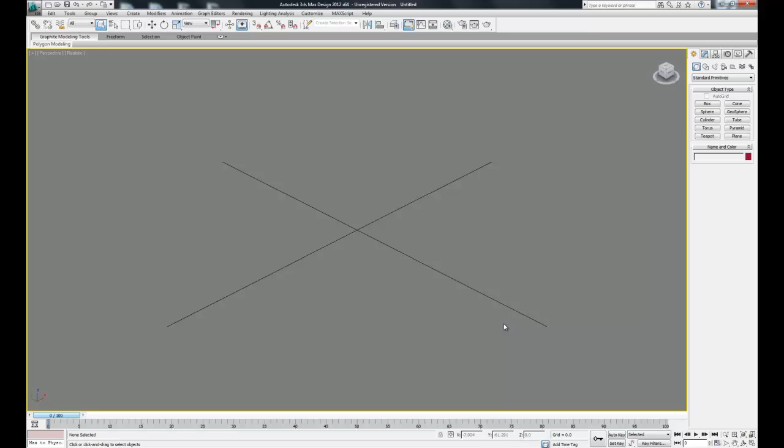So let's start by opening up our work cell. You can either open up your existing 3ds Max animation file, or you can re-import the Inventor file, whichever you prefer. So I'm going to re-import this and I get the import screen. I'm just going to accept the defaults here.

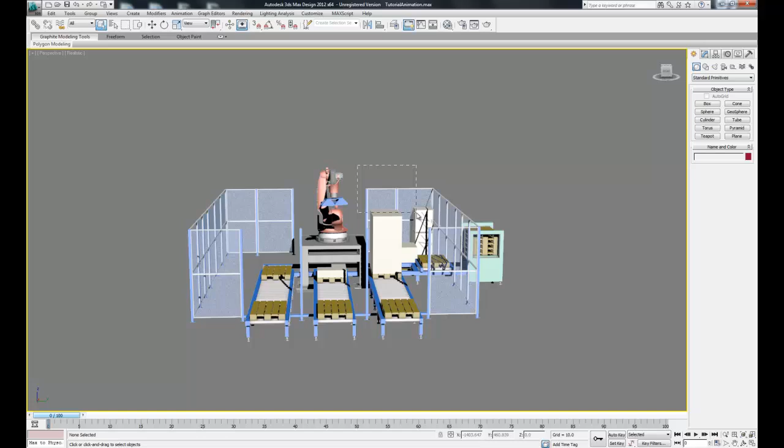So now we have our work cell up. What I'm going to do is hide everything except for the robot to make it easier to work with. So I'm going to select the objects, right click, and hit hide selection to hide everything.

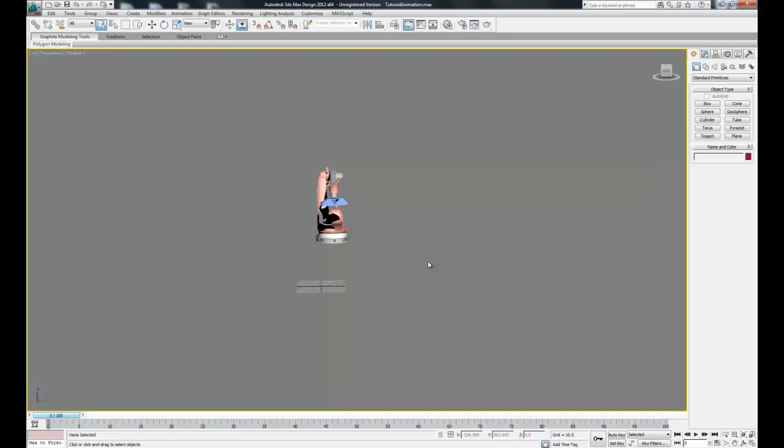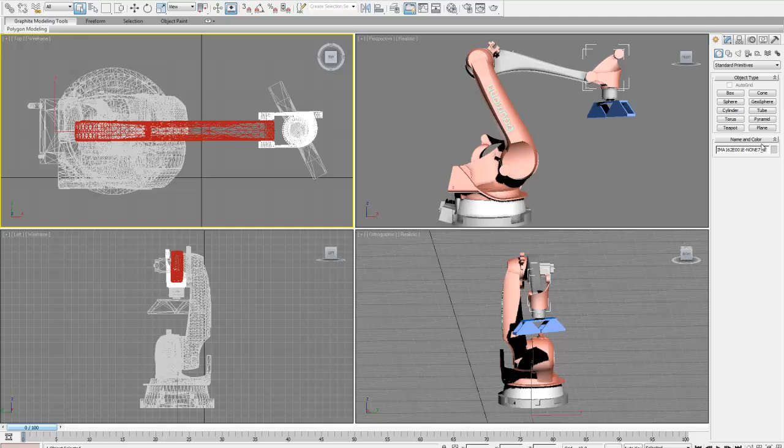So now that we have just our robot, what I'm going to do is set up the viewport so it's easier to see everything. You'll notice in the wireframe mode all the pieces are white, so what I'm going to do is change each of these to a different color so they're easier to differentiate. Over in the Create tab under Name and Color, there's a little box that has a color. So after we've selected our object, we can click that box and change it to whatever color you'd like.

So now that that's all done, I'm going to go into the Hierarchy tab and we're going to start doing our forward kinematic setup. First, make sure Pivot's selected, and then we're going to select the lower arm and work with that first. Now what we're going to be doing is readjusting the pivot point of each object so that it's centered at the place where we want the object to pivot around, and that way it'll look natural.

Now what we're going to do is select Affect Pivot Only in the Hierarchy tab. What that's going to do is allow us to move just the pivot without moving our object. You'll notice the pivot point isn't exactly where we want it, so we're going to need to move it.

Now when doing forward kinematics, it's really important that we work in the local coordinate system, and I'll explain why in a little bit. Over in the Hierarchy tab, there's an option called Center to Object. What that's going to do is move our pivot to the center of our object, which is going to give us a good place to start when we reposition it. So we see after we selected that, the pivot point moves to the center of our object.

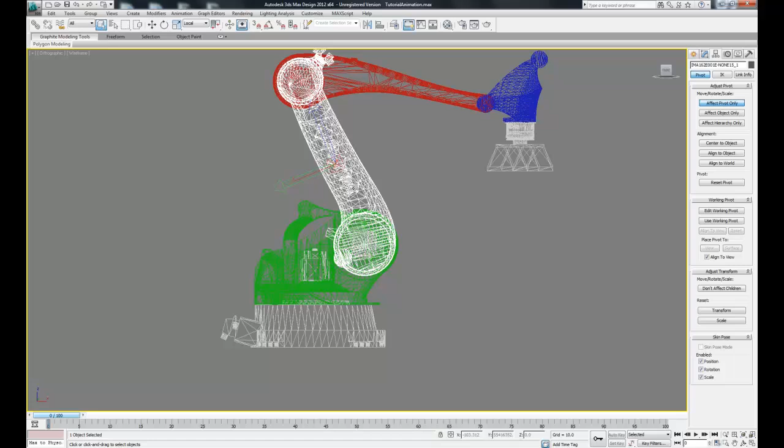So now what we're going to do is maximize the screen so we can get a better look, and then click the Move command, and then move this down to the lower pivot point where we want this arm to pivot around. Again, make sure you're working in the local coordinate system. We don't have to be too precise here, just as long as we get the desired effect.

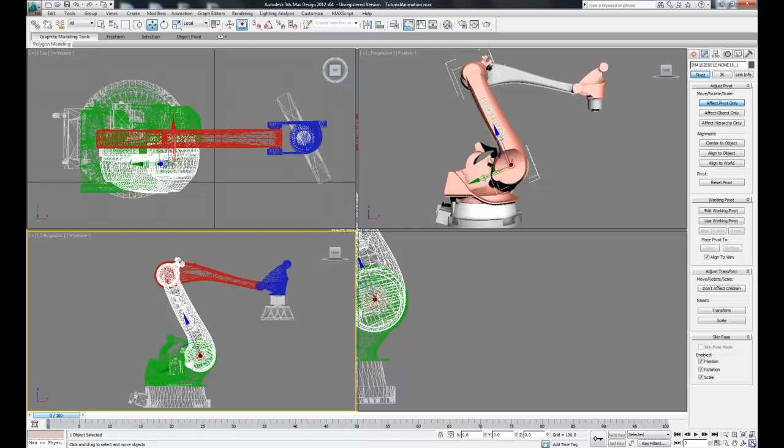So once we have this about where we want it, we can check to see if it's in a good position. Let's deselect Affect Pivot Only, and we're going to actually rotate the whole arm to see what it looks like. So click the Rotate command, and then we can rotate it about the proper axis and check to make sure it's rotating properly.

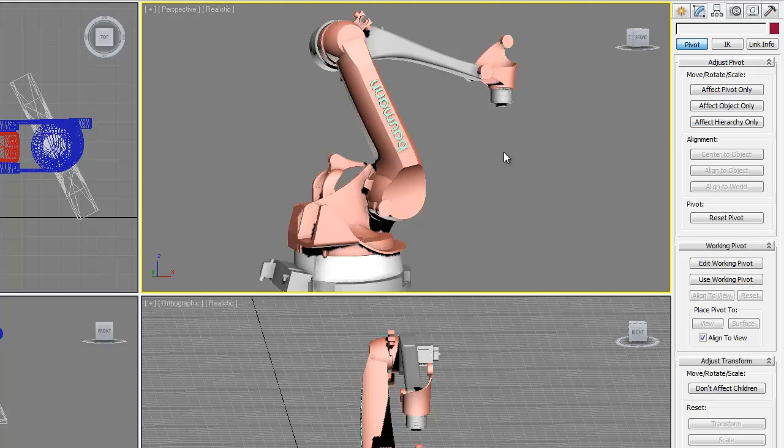So when we're checking these, it's really important to return the object to its original position so we can keep working. So always use the Undo command or Ctrl-Z to return the object.

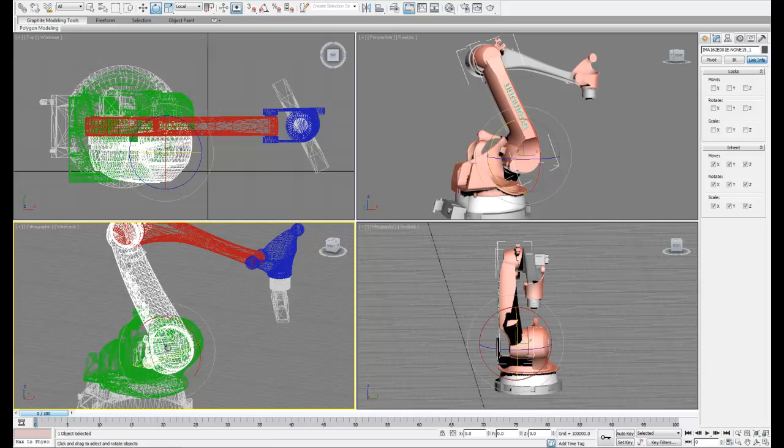So now what we're going to do is restrict all other motion except this rotation. We're going to do this by using the Link Info tab inside Hierarchy. This is the part where it's really important that we're in the local coordinate system, because that's never going to change when we start moving our robot all over the place. You'll notice from our triad here that we're going to want this piece to rotate just about the x-axis.

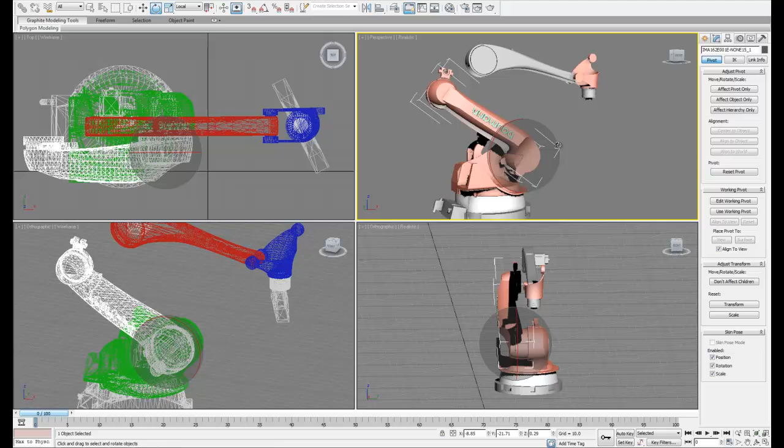So let's go over to the Link Info, and we're going to lock everything except rotation about the x-axis. You'll notice when we try to rotate this, all the other axes have disappeared. So now no matter what we do, we can only rotate about the object's own x-axis. This will help prevent mistakes later when we animate.

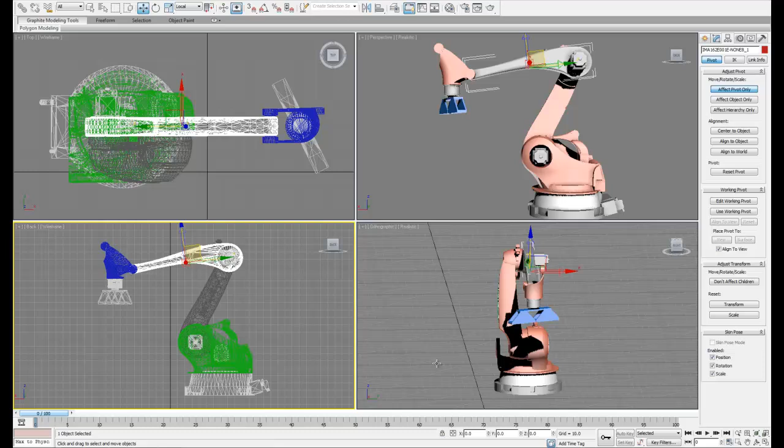So next we're going to do the exact same thing with the upper arm. Select the arm, select Center to Object, and then reposition the pivot point to where we want this to rotate about.

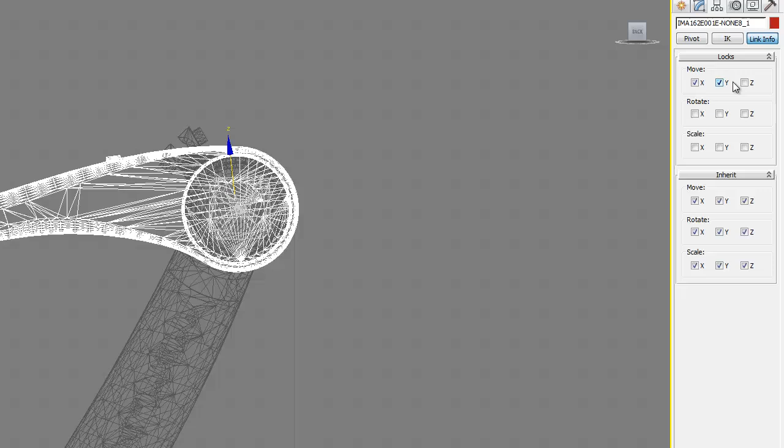Once that's positioned, let's go to Link Info again and lock everything except the rotation about the x-axis. You'll notice that when we check the boxes under Move, the arrows that let us move the object started to disappear. So now we can check again that this part swivels like it should, and then return the object to its original position.

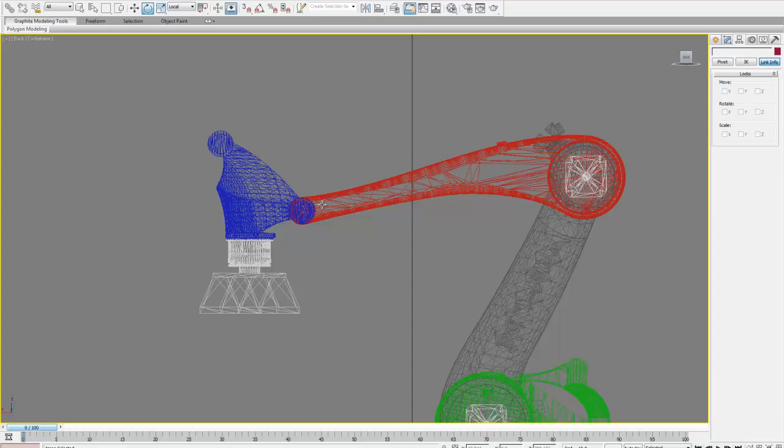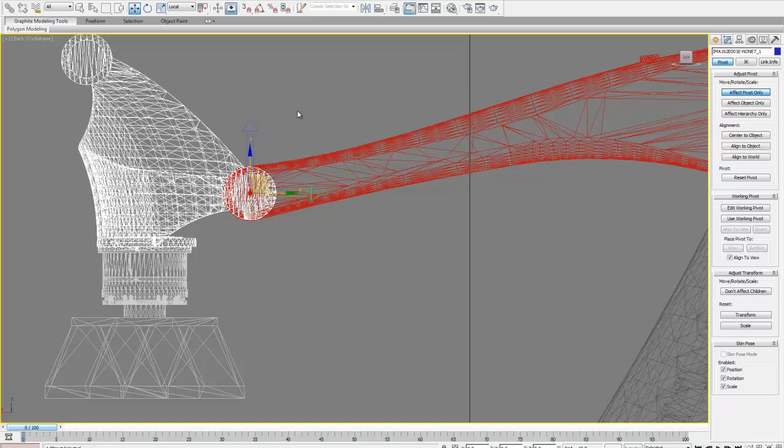Now we're going to do the exact same thing to this next piece. If we happen to be in the view coordinate system when we lock all of our motion, when we rotate our robot, our axes are no longer going to line up between the local and the view coordinate systems, so the results will be unpredictable. When we use the local system, it doesn't matter what position the robot's in because we can control its motion relative to its current position.

Next what we're going to do is move on to the base here. We'll notice that the pivot point actually looks pretty good, so we won't have to do a lot of work here.

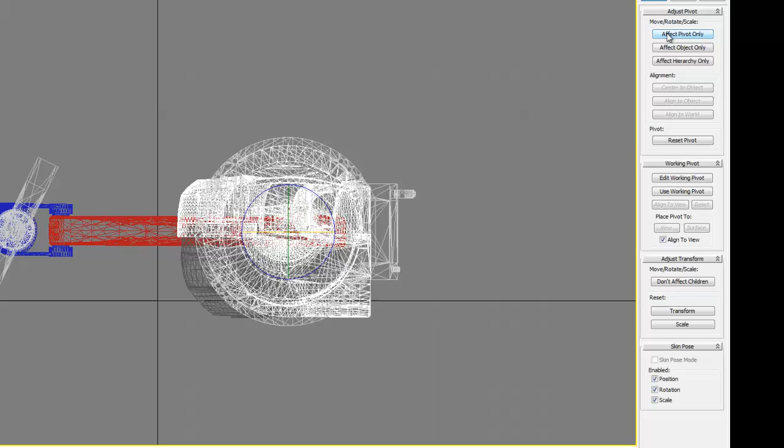Let's go ahead and lock this. Now we want this to move around the Z-axis this time, so lock everything except the Z. I'm going to switch views real quick and do the same exact thing with the last piece.

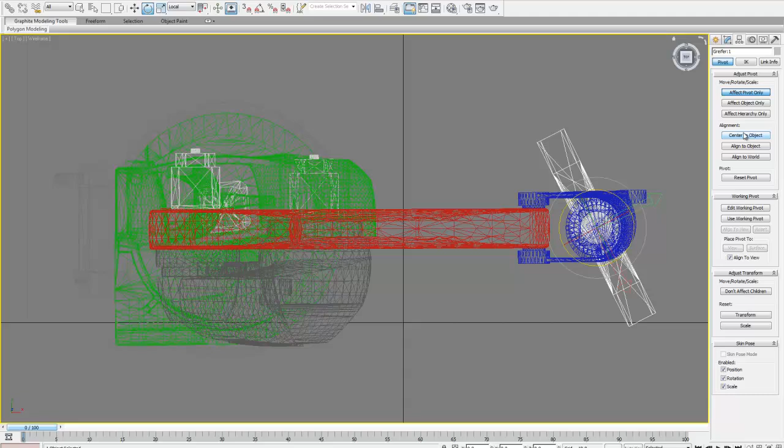This one, if we center the object, because the object's symmetric, it actually goes to where we want, so again we don't have to do much work. Like the base, this one rotates about the Z-axis, so we can lock everything but the Z again.

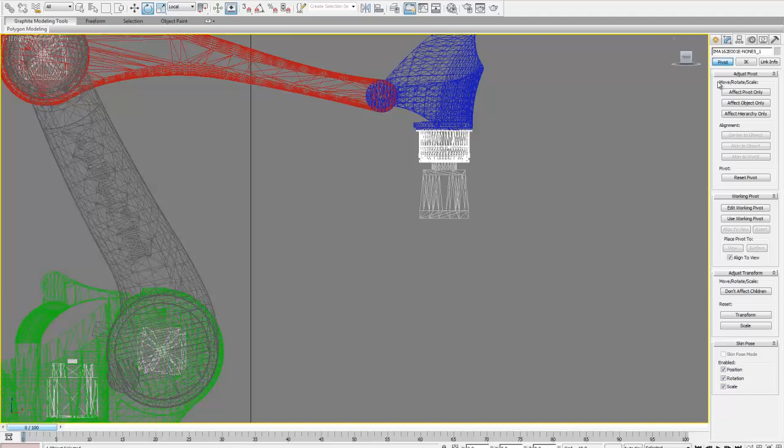Next what I'm going to do is just lock this collar in place so that it can't move in any direction.

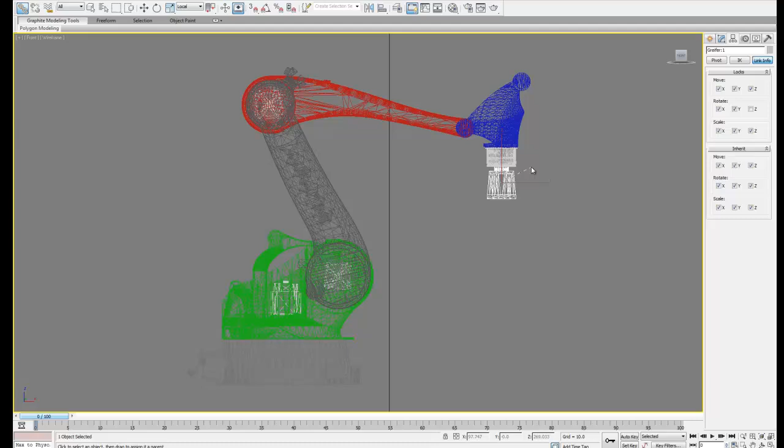Now what we're going to do is link these together so we get the proper motion, using the select and link command. Starting at the front of the robot, we'll work our way back. Let's select our first piece and we can click and drag and release our mouse over the second piece, and that'll link those two together. Then we can do the same thing, working our way back.

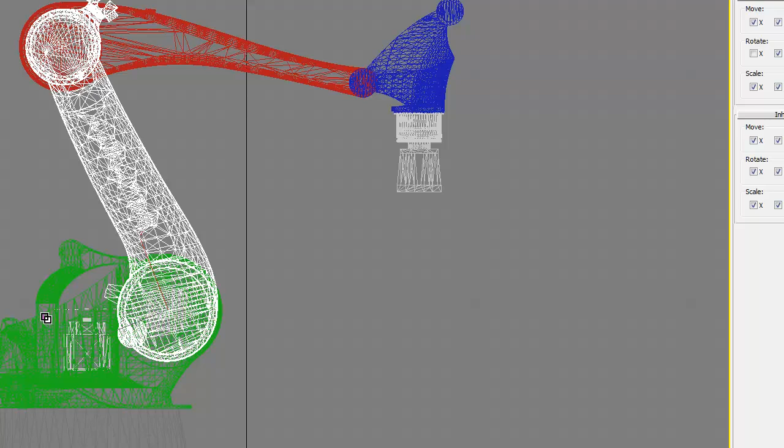Now there's a few last details we need to take care of before we're ready to move this thing around. First, we need to lock the base in place, so just check every box under the link info.

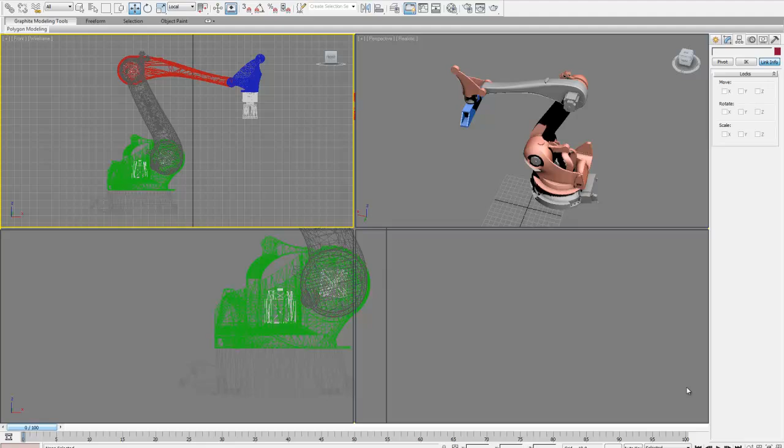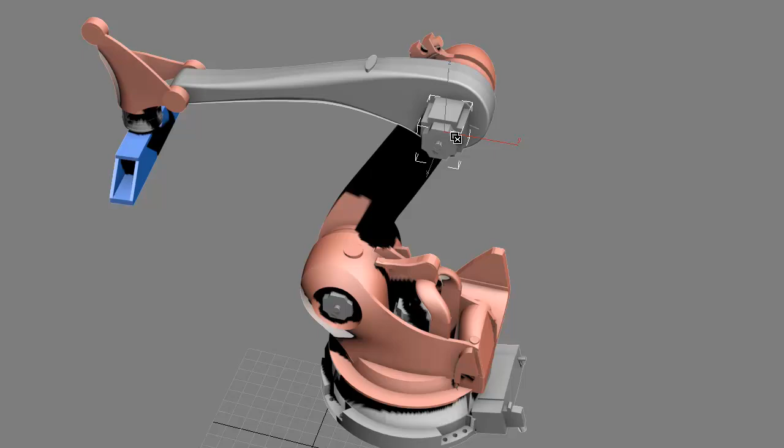Now what we're going to do is there's 3 little brackets that we need to link to our arms. You can choose which piece you want these to link to, and that'll determine what it's going to look like when they rotate. These pieces are going to look like they're rotating along with whichever object you link them to.

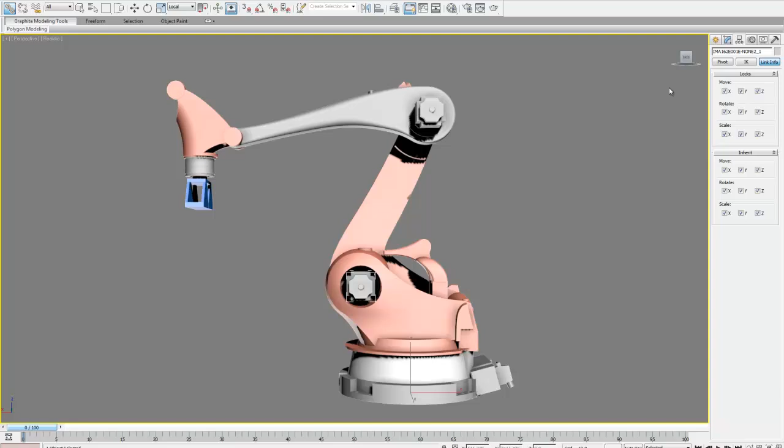Now all we have to do is lock the motion for each of these in all directions. Even though we're locking the motion, they'll still move relative to the other pieces. This is making sure we can't accidentally move these pieces when we start doing our animations.

Now with that done, we've completed our setup, and now we can check to make sure our robot works. Let's click the rotate. Again, make sure we're in the local coordinate system and we haven't changed it. Now what we can do is rotate each of these individually, and you'll notice that the others follow along properly.

If something doesn't move properly, you can check both the links and your link info where you lock the rotations to see if the problem can be fixed.

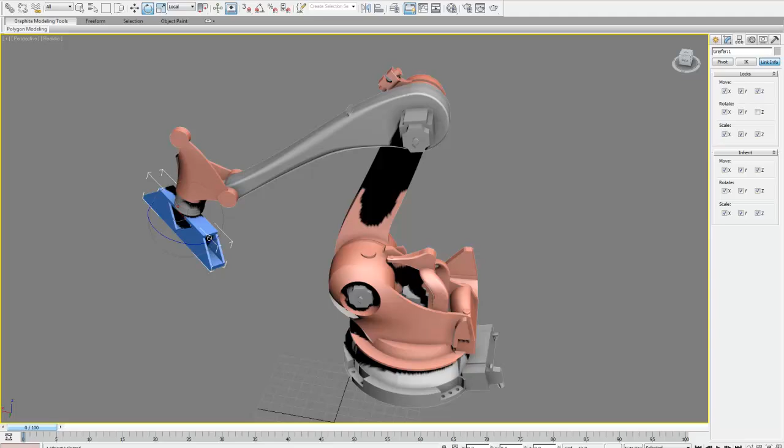Now what we can do is right click and hit unhide all, and that puts our robot back in our work cell and we're ready to animate.